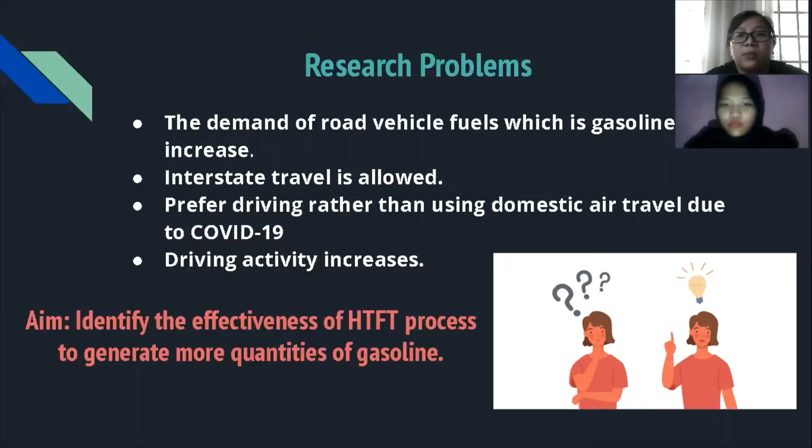The aim of the study is to identify the effectiveness of the HTFT process to generate more quantity of gasoline. There are three objectives that need to be achieved in this study.

The first objective is to study the FTS process by doing a literature review.

The second objective is to develop the process flow diagram and determine the mass and energy balance by collecting data.

The third objective is to suggest ways to improve the effectiveness of the HTFT process in producing gasoline.

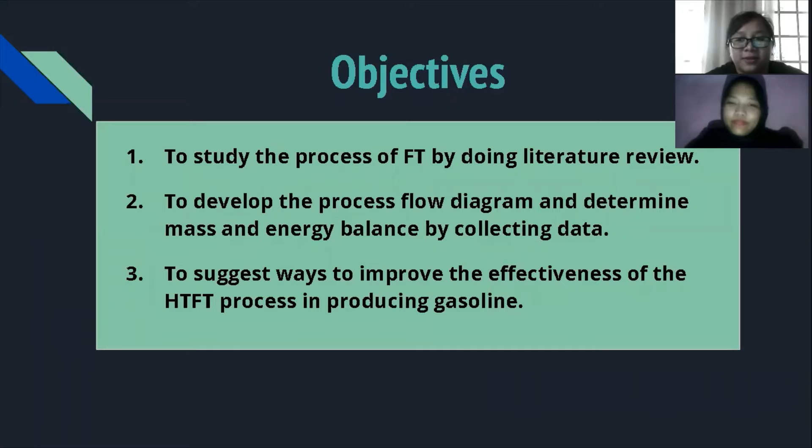I'm going to present the methodology conducted in this study. The first stage is identifying the commercial process in producing gasoline, which is the high temperature Fischer-Tropsch process, chosen to do the research in this study.

The second stage is the literature review, where all the information needed in this study is collected or gathered by reviewing journal articles and research papers.

The third stage is collecting data, specifically the mass and energy balance data of the HTFT process.

The next stage is doing the programming. The mass and energy balance is developed with the help of programming using an Excel spreadsheet.

The last stage is analyzing and interpreting the data. The HTFT process is discussed in detail, the mass and energy balance is developed, and ways to improve the HTFT process in producing gasoline are suggested, which will be discussed later on.

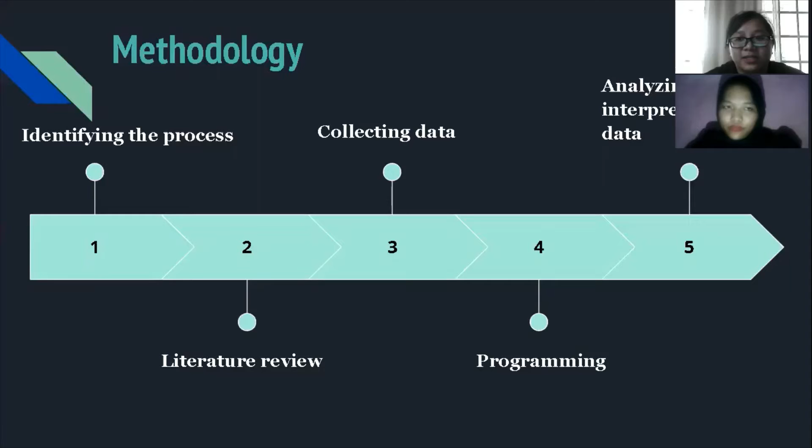Okay, thank you. For the next part, I will talk about the knowledge I've gained from the literature review. First, I'll talk about gasoline.

Gasoline, which we all know as petrol, is a petroleum product that consists of a mixture of hydrocarbons. Its main function is to be used as a fuel in internal combustion engines. In Malaysia, the most common gasoline we use is RON 95 and also RON 97, used for our car engines.

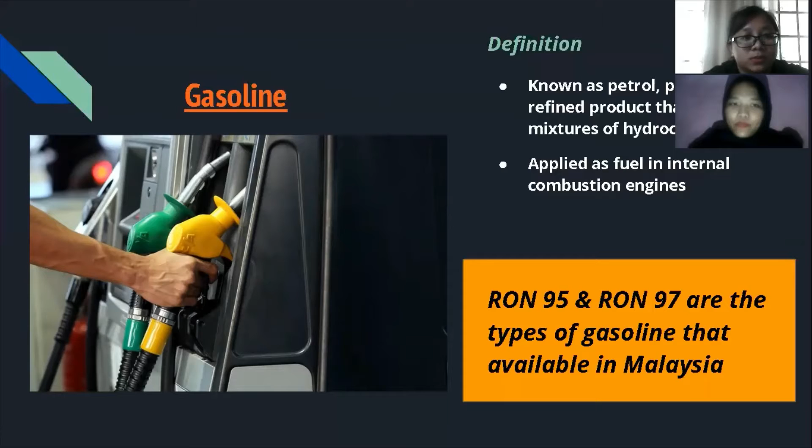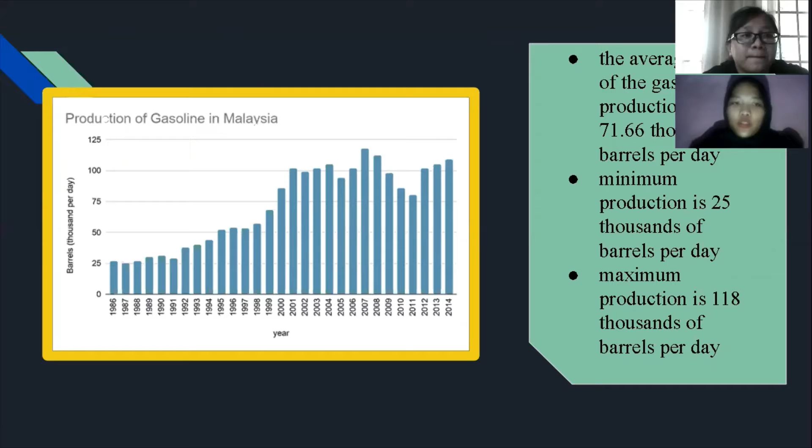Based on this slide, we can see a bar chart of the production of gasoline in Malaysia. We all know that Malaysia also produces gasoline.

This chart shows Malaysia's production of gasoline from the year 1986 to 2014. For this period of time, the average production value is 71.66 thousand barrels per day, meaning one day we can produce almost 71.66 thousand barrels.

For the minimum production, it's 25,000 barrels per day, while the maximum production is 118,000 barrels per day.

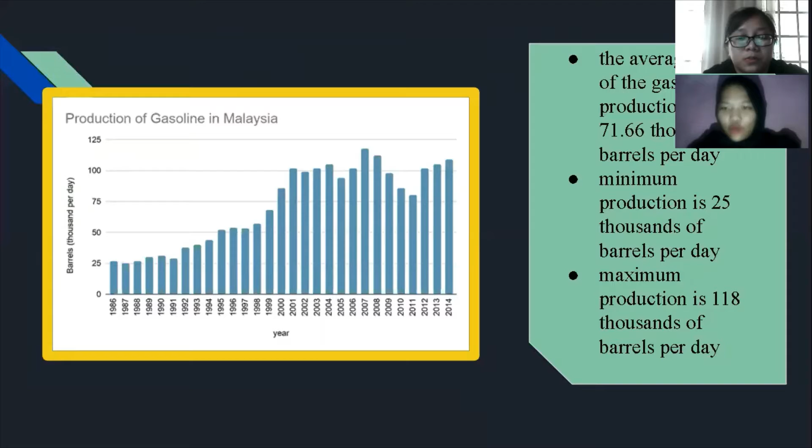The next one is gasoline consumption in Malaysia. As I said just now, the famous gasoline we use in Malaysia is around RON 95 and also RON 97.

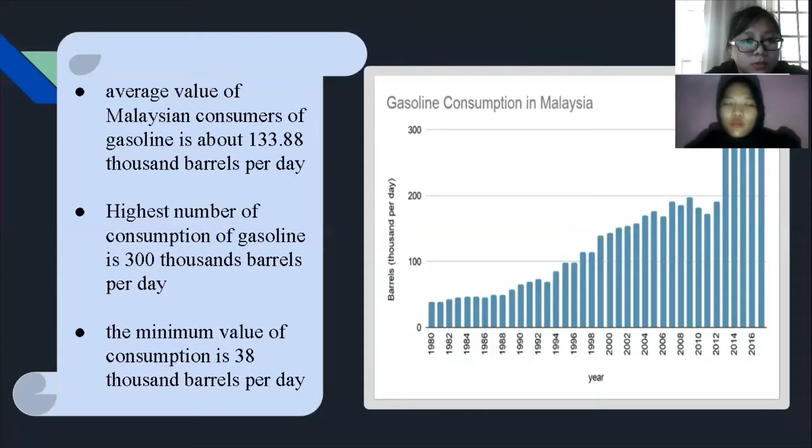For this graph, we can see the gasoline consumption in Malaysia from the year 1980 to 2017. The average consumption is about 133.88 thousand barrels per day, with the highest number in 2017 at 300,000 barrels per day, while the minimum consumption is 38,000 barrels per day in 1980, which I think is due to there not being much vehicle use at that time.

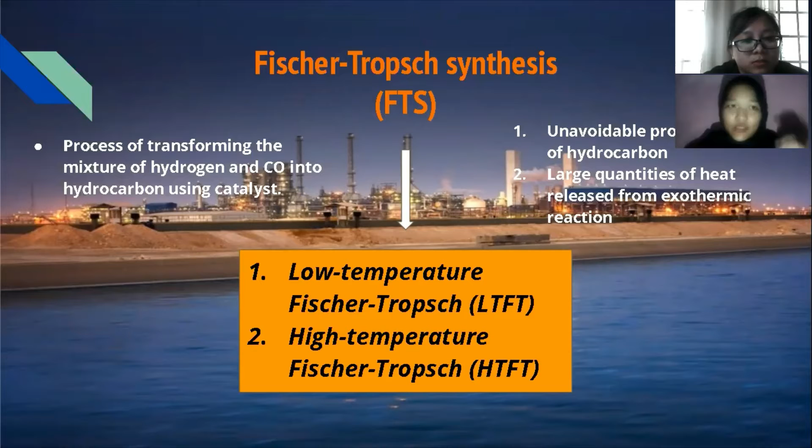The first type is low temperature Fischer-Tropsch, LTFT, and the second type is high temperature Fischer-Tropsch, HTFT. For this research, we focus more on high temperature Fischer-Tropsch. This is the general knowledge about high temperature Fischer-Tropsch. As I said just now, the Fischer-Tropsch process is an exothermic reaction. The exothermic reaction produces steam, and this steam has to maintain the temperature in

this process. For high temperature Fischer-Tropsch, the temperature that we use is from 320 to 350 degrees Celsius, and the pressure of this process is 25 bar, or we can also use slightly higher pressure. And for high temperature Fischer-Tropsch, we use the iron-based catalyst.

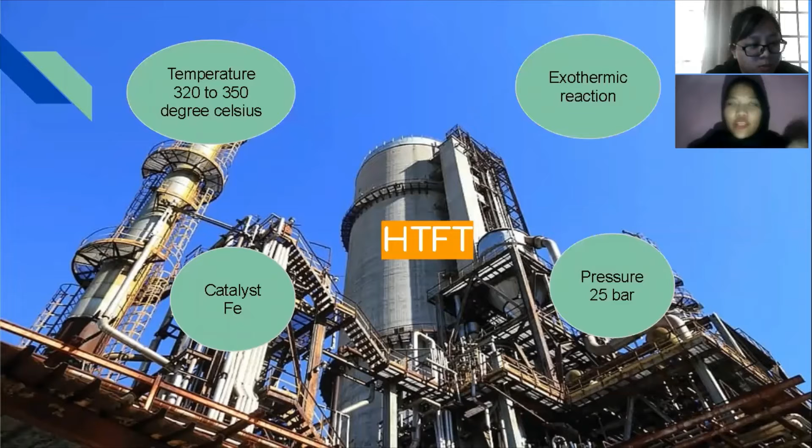Okay, next we also collected some data about the mass and energy balance. This is the basic equation of mass balance, which is input plus generation minus output minus consumption is equal to accumulation. The general equation for energy balance is the difference of internal energy plus the difference of kinetic energy plus the difference of potential energy is equal to heat transfer and work done. The difference is the final minus the initial.

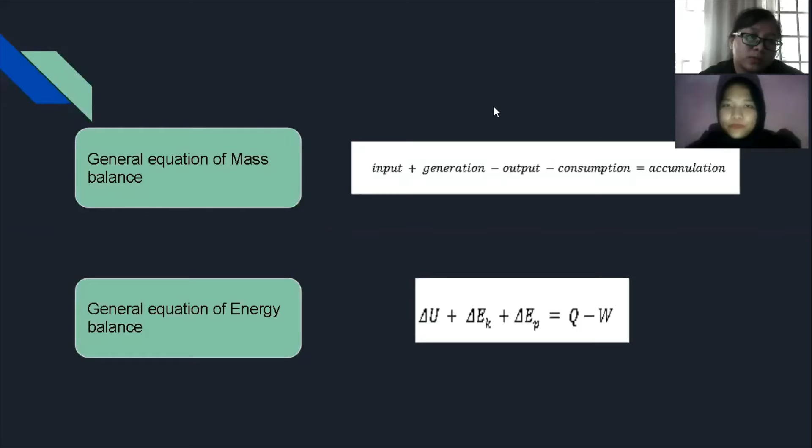Okay, this is a general overview of the Fischer-Tropsch synthesis. As you can see in the graph, it is divided into two, low temperature and high temperature. First, the feed of our Fischer-Tropsch can be coal, natural gas, or biomass, and we also have air, oxygen, and steam. For our research, we will talk more later; we have our own block diagram.

So first, the feed will go into the gasifier, and after that, to the gas cleanup and conditioning. It will produce a clean gas, which is H2 and carbon monoxide. Then they will split into low temperature and high temperature. As we can see in the table, for low temperature, they go to a slurry or tubular reactor, and it produces wax, which then undergoes hydrocracking to produce diesel.

While if we go to high temperature, they go to a CFB or FFB reactor. Then it produces olefins, which are C3 to C11, slightly lower than wax; wax is more than carbon 20. The olefins will then undergo either oligomerization, isomerization or hydrogenation to produce gasoline.

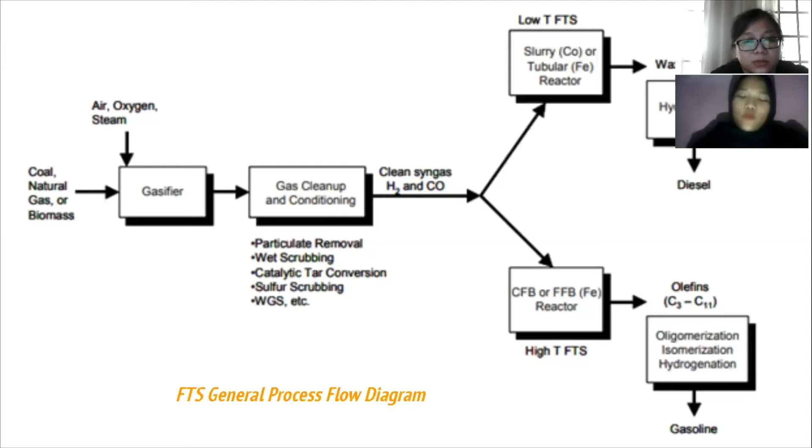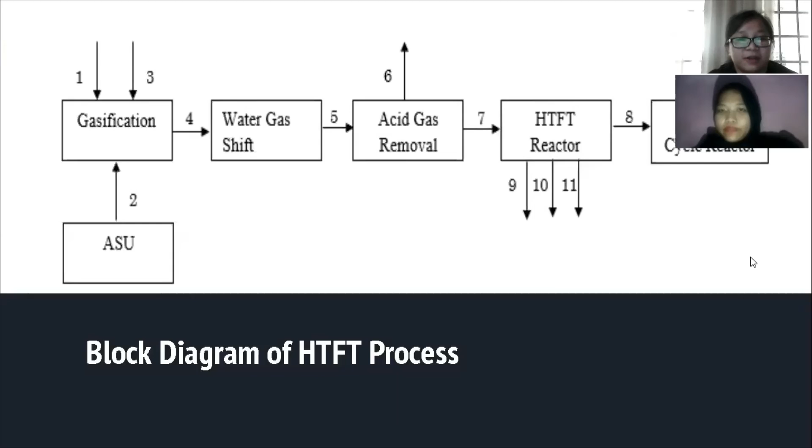And this table shows the number of streams and the stream name of the previous block diagram. So this is the mass energy balance for the high temperature Fischer-Tropsch. So you can see, just now Sophia introduced the stream number and stream name, and she also talked more about the description of the HTFT processes. So as we can see, for the mass balance, we will use the flow.

For the first three streams, we will use the flow rate in kilograms per hour, and for the next 5 streams, we will use a flow rate in the unit of kilo normal cubic meters per hour, and then for the last 3 streams, which are the production streams, we use the unit of barrels per day. So because of that, it is a little bit difficult to determine the mass balance due to its different units.

So next, for the energy balance. For the energy balance, we will use the lower heating value in megawatts. Actually, the lower heating value is used to determine the energy input of the stream. So as you can see from the table, we simply use the lower heating value to determine the energy balance using the MW, megawatts, unit.

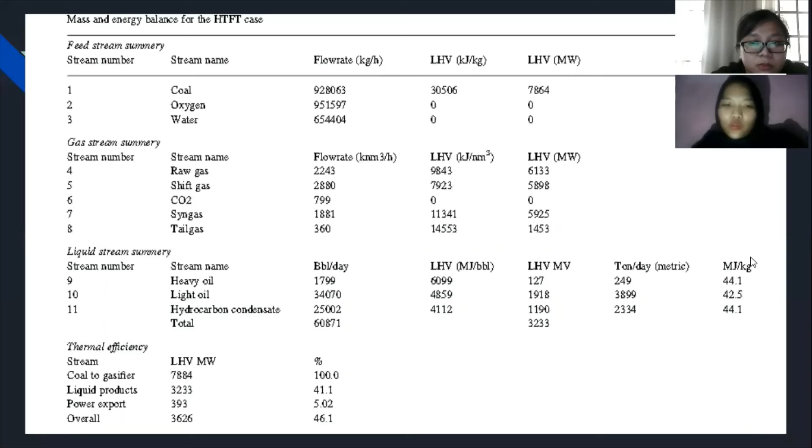So next, I'll talk about the thermal efficiency. As you can see at the bottom of the table, it states the thermal efficiency. So first, as I said, the feedstock of our production is coal. As you can see from the table, the coal turned into the gasifier at 100% thermal efficiency, which means almost all of the coal is turned into gas

in the first stage. And then for the liquid product, the thermal efficiency is 41.1%, and then the power export is 5.02, which is a little bit low. And the overall thermal efficiency turned out to be 46.1, which is a little bit disappointing because it's not even half of the percentage.